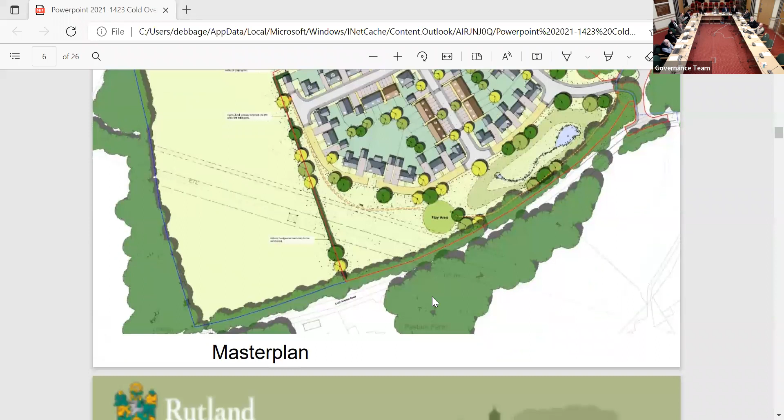Oh dear, this thing's got a mind of its own.

That's just a plan of the application for the other site, just to see how they relate. It was impossible to stitch them together, but just to give you an idea. So this plan shows some of the constraints and opportunities.

So I'll just quickly go through what we've got here. Number one says existing tree cover at boundaries of the site to be retained. Number two, along the frontage, vegetation on the Cold Overton Road boundaries is key to the contained visual setting of the site. Historic mapping shows there was a hedge line along number three, and this is all one huge field at the moment.

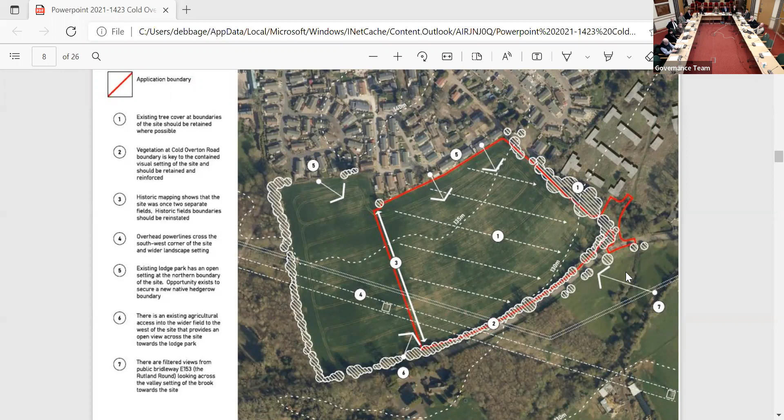The proposal is to reinstate that hedge line down there. The overhead lines at number four, as we've said. Lodge Park has an open setting, but we've negotiated an extra landscape strip in there. There's an existing field gate into the field at point six, which you'll see photographs from in a minute. And it talks about filtered views of the site from the public bridleway on the other side.

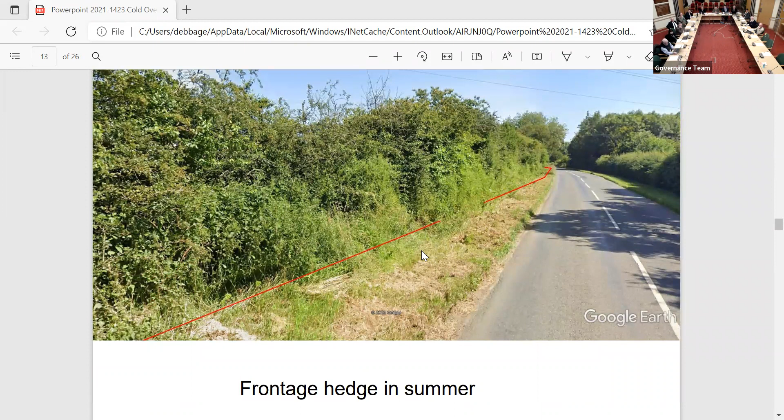And then that was just a Google Street View of the frontage hedge when it's in leaf in the summer. It provides quite a dense boundary even today, but it's even more so in the summer.

A few more elements in the overall design of the scheme, bearing in mind this is only the illustrative master plan. Again, access shared from Cold Overton Road. Development set well back from the road frontage. Historic field boundary to be put back. Balancing ponds in area number four. New open space across the front of the site. Agricultural access is retained through this point, as well as the existing gate, as I understand.

Generally landscaped entrance with provision for street trees along the access road. Small groups of buildings around key junctions with landmark plots.

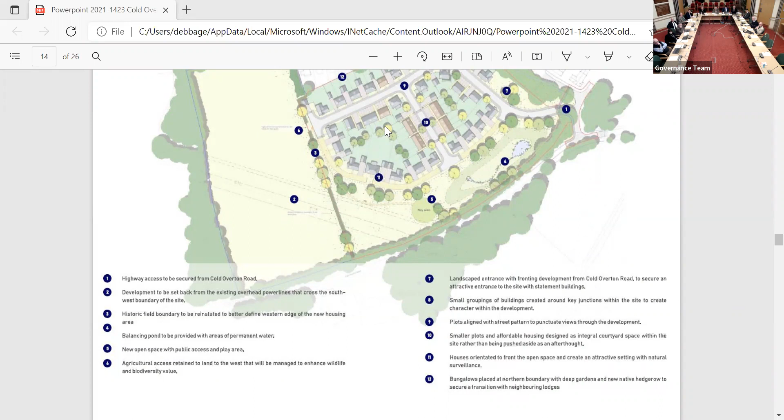Houses face out onto the open space, and bungalows along the northern boundary with a native hedgerow to reduce the impact on the neighbours.

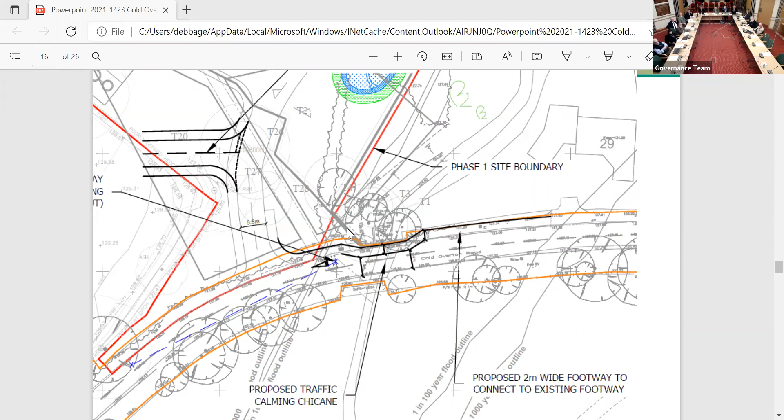It would link from that point to there - that's an existing highway grass verge to there, which would be created into footpath as well. From that point onwards, it is an existing tarmac footpath right down into the village. That's just a closer view of that proposal. So there would remain a 4 metre wide carriageway and a 2 metre wide footpath.

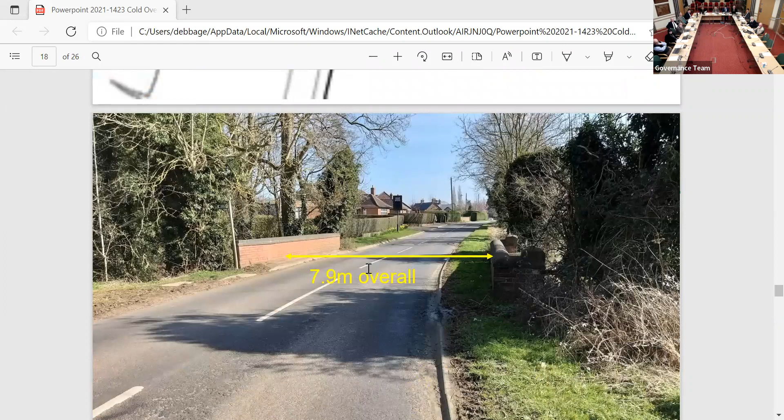The actual carriageway at that point at the moment is 5.6 metres overall. There's a 1.7 metre grass verge on the southern side and a nominal 600 concrete verge on the north side, so there's plenty of width to achieve that facility. And that's the photograph of the bridge as it is at the moment, with that overall width of 7.9 metres. You can see there's a 1.7 verge here and a 600 verge on the other side.

In terms of the main issues as set out in the report, the site is outside the plan limit to development. I'm told that the new replacement local plan, when it's finally drawn up, will draw the plan limits to development around that site that already has outline planning permission. So in that respect, this site would be adjacent to the PLD at that stage.

You'll see in the parish objection that they've made reference to policies in the withdrawn local plan, so you can largely ignore those because they're no longer relevant.

The width between the two parapets of the bridge is 7.9 metres overall. So on this side, the footpath from the new access to the development would emerge and carry on as a new 2-metre footpath along this side. That grass verge would become footpath to join onto the existing tarmac footpath, which continues into the village.

This side would remain as it is, as a grass verge, and it would retain a 4-metre road in between, with the give-way schemes, as you've seen in several places elsewhere.

Why was it not deemed possible to put this footpath on the other side of that brick wall? Narrowing roads is all well and good, but our council seemed intent on widening roads in the countryside to make them more of a racetrack. Now you start narrowing that piece there, and I use it nearly every day, and it'll be a nightmare. That's my point.

Councillor Payne: Can I answer Councillor Cross's point, certainly. When the application for the outline scheme, which has already been granted, was considered, the Highway Authority at that time didn't think it was feasible to get a narrowing on the road side of the bridge. The developer actually looked at suspending a footpath on the stream side of the parapet wall, but where it would have landed on the eastern side towards the village, it could only land on the private land belonging to that bungalow at the end there. So the only way you can achieve it is to bring it out this side of the parapet and connect it onto the highway verge and footpath further on.

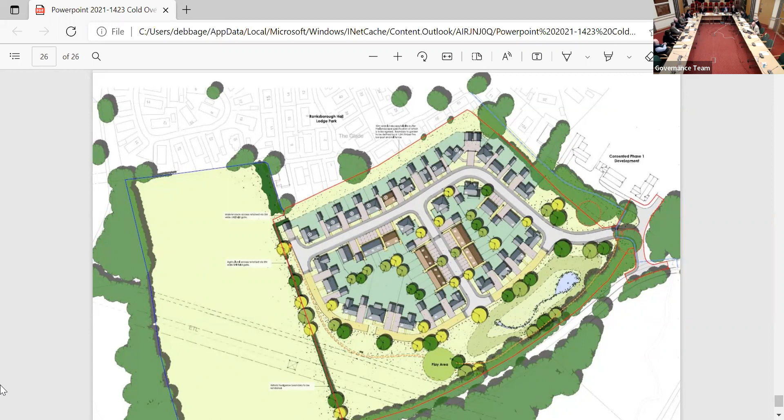Not any enforcement updates this meeting. I'm going to close the meeting formally, but if you could just say the proposed presentation.